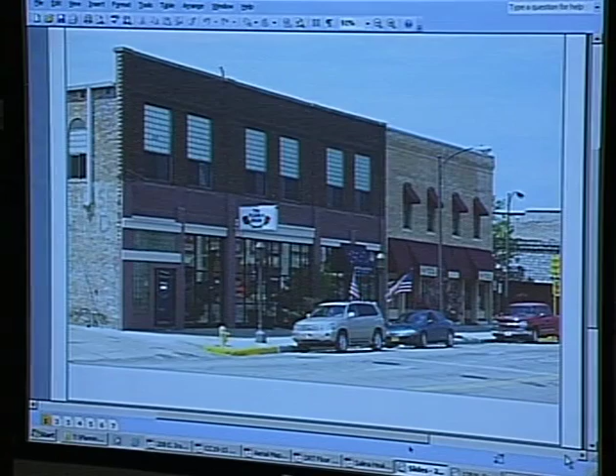The building at 208 has some history outlined here. It began in 1919 as an agricultural implement store, continued as a billiards parlor in the 1920s, then a hardware store again from 1923 to 1939 and continuing to 1946. It also was the location for a Pittsburgh Plate Glass business starting in 1946, and later the Salina Glass Company, which you may remember. Then on March 7, 1981, there was a fire that damaged some of the upstairs of the building, and it was used primarily as a warehouse after that.

The building has 75 feet of frontage, and the front facade is distinguished by its big spandrel beams. The design has a wainscot of painted material, with stucco detailing above the storefront openings, in locations that originally had an overhead door. There was some stucco covering on the pilasters that divide the building up. The eastern 50 feet is for the Flower Nook, and there is a lease space on the other 25 feet, which has generally been a beauty shop.

This just gives you another view. It shows that it's mostly glass.

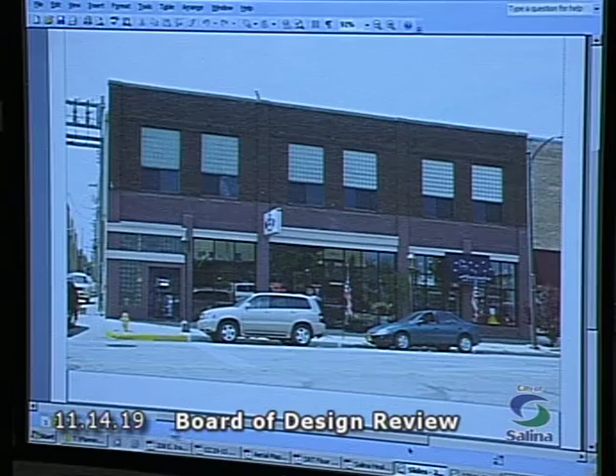The projecting Flower Nook sign was installed in 1998, and the applicant is proposing to augment the existing sign by putting a decorative surface sign on the stucco transom area above the storefront and on the storefront pier. This shows both the before and after, where the new artwork would be over the upper transom area, basically on the second story, measuring 9 feet in one dimension and 6 feet tall in the other. That would be a vinyl product, heat applied to the masonry, giving it a very durable and vibrant colored surface.

The proposed sign would appear to be proportional to the building and should not dominate its appearance. It would add an attractive element to the storefront, which currently has only one small projecting sign, and the colors and materials used would be compatible with the adjacent materials.

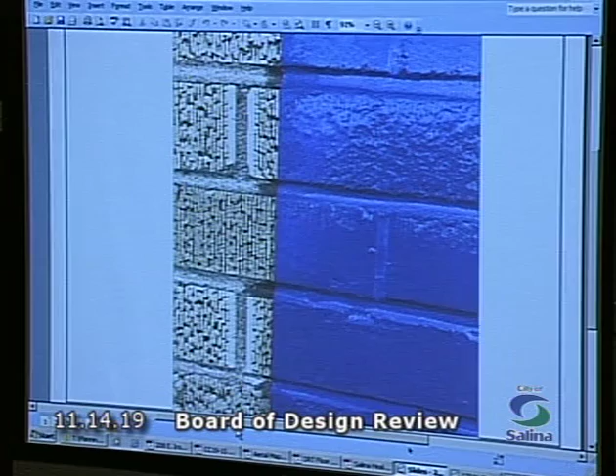If we could go one more, Dustin, on this. This shows an example of the product on a sign on East Iron Avenue, a larger sign, and this is the bonding product here. It's a vinyl product that's heat applied to a clean brick or masonry surface, and it adheres very well. The product is warranted to be color fast and weather resistant, certainly as much as a painted sign would be.

The sign could be considered a mural. Our sign code defines a sign broadly as any illustration painted on a building used to announce or direct attention to services offered inside. In this case, it identifies products inside the building and augments the existing sign, which requires submission of a sign permit application and your review. We have an arts and entertainment ordinance in progress with downtown constituents, and the definition of a mural may become more fine-tuned. At this point, this is similar to the Welcome to Salina sign put up in 2017 by Leadership Salina, which also required both a sign permit and board review, so we're consistent in that respect.

As far as suggested findings today, we believe the proposed sign will be coordinated with the overall facade composition. It will emphasize structural elements and will not cover or obscure architectural features. We believe the colors and materials shown are compatible with the building, and the use of symbol and logo signs is encouraged downtown.

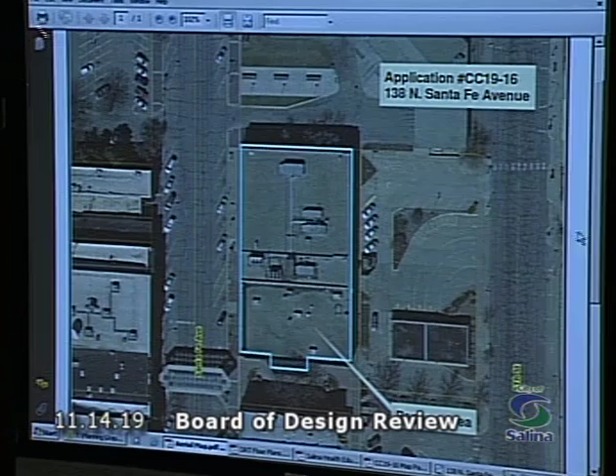The city records go back into the 1950s and 60s when these buildings were originally built as banks. This shows the overall perimeter of the building. The top portion of the building has been rehabbed for the KU School of Medicine, and what they are looking to do is develop the south 74 feet for the nursing unit of the building.

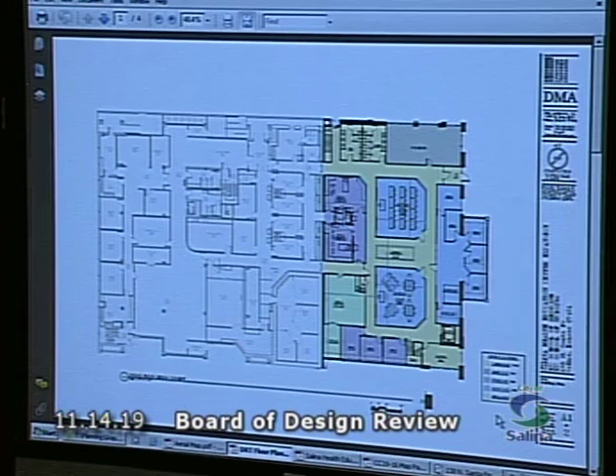The colored portion shows the proposed floor plan where these areas that currently have alcoves would be built out and developed into storefronts, both here and in this location. This protrusion that is currently glassed would become offices in that location, and the rest are supporting structures. But the idea is to integrate the building together because both those units are very compatible.

To do that, they're going to replace a portion of the south 74 feet facade, and this shows the existing structure. The north building is different in that it has some different divisions and building bays, a curvilinear storefront cornice, as well as these prominent pilasters and a recessed storefront. That was looked at in 2017 and approved by this board.

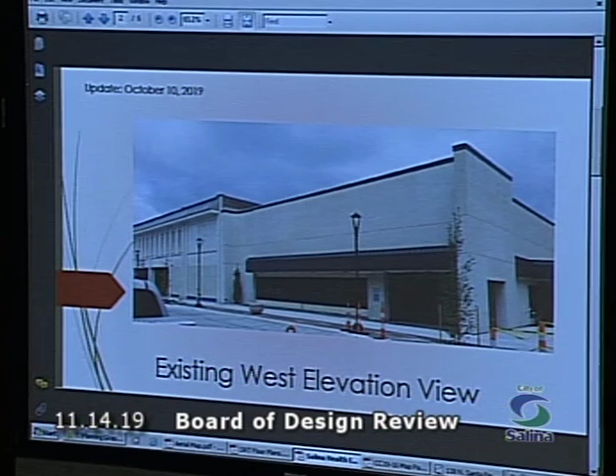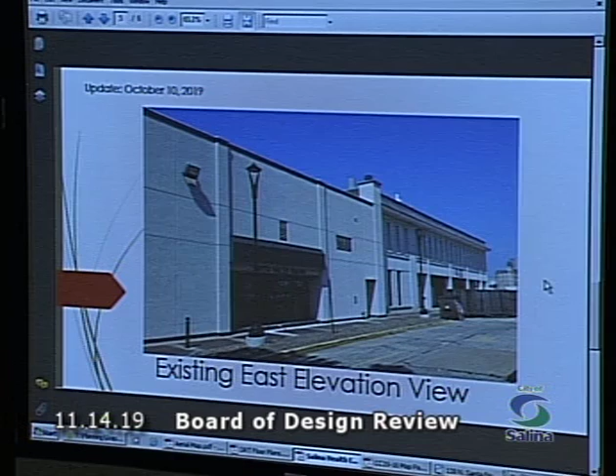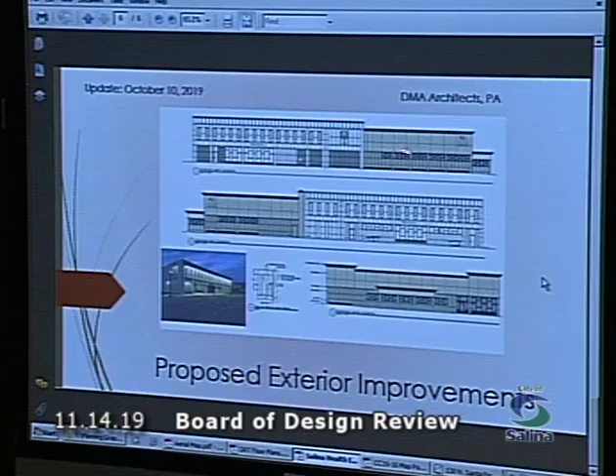What is being proposed at this point is shown in the next slide, where the south building shows that the bottom 8 feet of the facade will be removed and replaced with a stone veneer finish similar to the building at the north, where it has divisions starting at approximately 8 feet. This is a stone material that's different from the stucco cover.

They would retain the paneled stucco covering on the upper part of the building, but would replace that with the stone panels and raise the windows up further into the facade so that it matches that 8-foot height, mainly for privacy on the inside. That same treatment would be on the other sides as well, on the south.

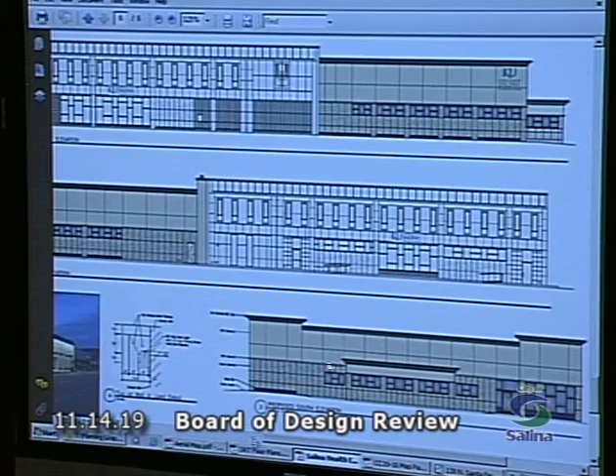This shows the south building and the east of the building here. Basically, this takes away two of the alcoves but develops an entrance on the very south of the building where there will be a new storefront.

So what you're looking at is just a variation in the materials on the outside of the structure. They would be approximately the same tone and servicing, but the stone veneer would act as an accent, as well as having windows that are both functional and compatible with the spacing and the rest of the building.

We believe the proposed new wall signage will replicate the existing signage on the north building. These would be duplicates of what's existing now on the north building, and that will be placed on both the east and west sides of that south 74 feet.

The new windows would appear to be proportional to the structure, and the facade of both buildings are contemporary in nature. The proposed exterior renovation, because of that, should not negatively affect the building's overall character.

Under findings, we believe the proposed changes will not remove or damage any significant character-defining features. The building reflects its origins and renovations from the 1960s, so intact architectural features will be preserved wherever possible. Construction methods will be used to protect historic and original materials, and the proposed wall signage will match the existing signage and be proportional to the building.

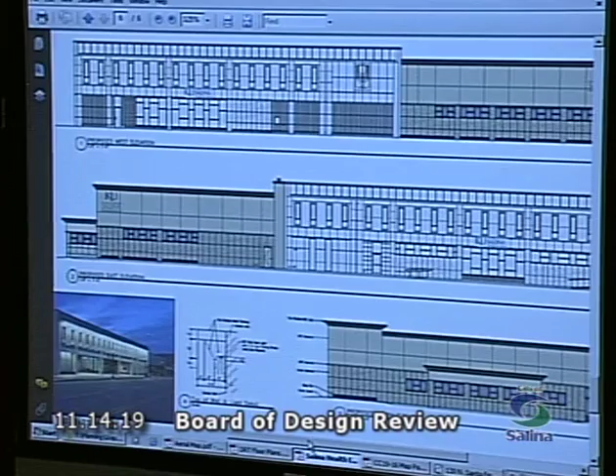Staff would recommend option number 2 — that if there are any significant changes, these would be presented to the Development Services staff to determine whether additional review is required. This is also held in abeyance for 14 days for public protest or appeal. At this point, staff would welcome any questions.

We do have the project architect here today who could answer the finer portions of what the surface materials and the final colors would be.

Okay, thank you, John. Does anybody have any questions of staff? None? No. Okay.

The applicant is present and would like to speak.

My name is Don Mars with DMA Architects. John, I think, has done a very good job explaining what we're talking about doing.

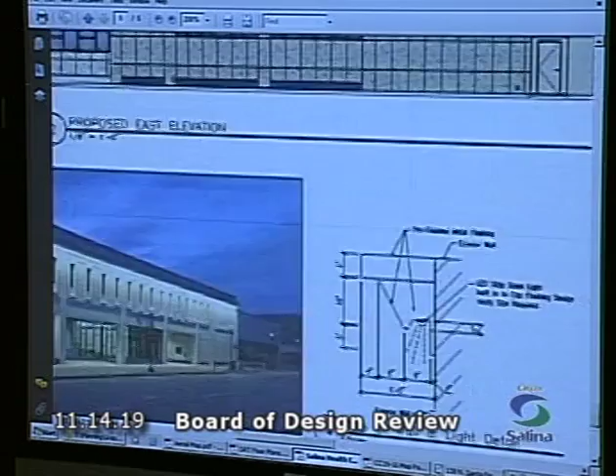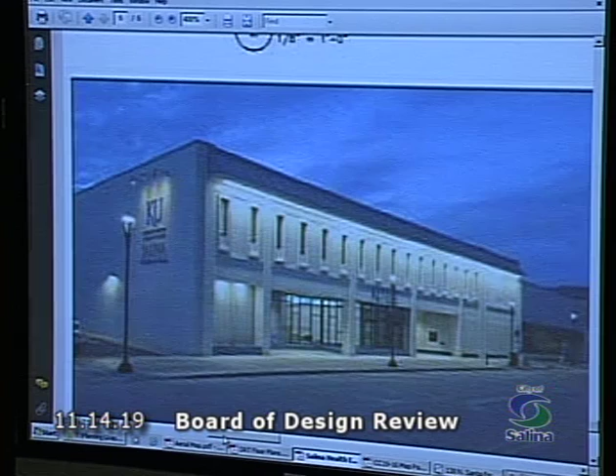One of the things the picture down here shows, and I use this picture as an image to show the foundation board as well, is that we lit this cornice up very well on the front here. We're planning on putting a cornice on top of the south building that we can add light under, so that we light it in the same manner as the north building, carrying on that nighttime lighted character of the building into what we're doing.

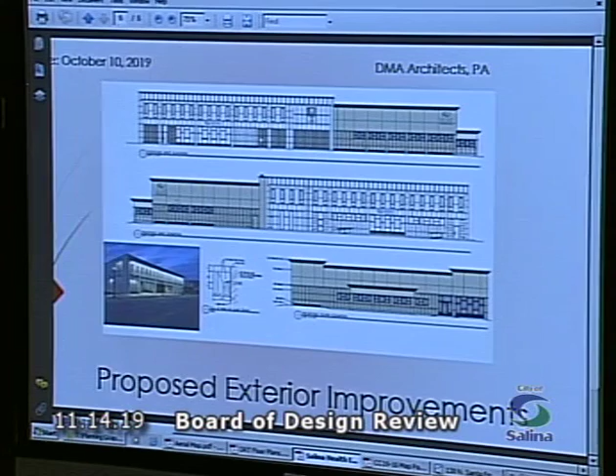The other thing I would add — the plaza on the south side of this building has been completed, and the city's shared with us the design and layouts, with a few modifications to be made. We'll be taking the landscaping material out during construction, because we've got to get access to the exterior of the building, and then putting it back. We have an agreement worked out with the city to do that.

So those are the issues. When we're done, this dark metal facade obviously is going to be gone. The plaster materials John was talking about — we'll retain them above basically this horizontal line that matches up with the line on the other building.

We replaced the stone on the east side of the other building when we did the initial renovation in 2017, and we're using the same material and the same kind of patterns to carry it around to the front. We also used some blue tile on the bottom of the facades on the front in a couple places.

In our design drawings, if you could go back to them, I'll point that out — this band across the bottom is the blue tile we're talking about, and there's the entrance. You'll see it in a number of specifically chosen locations around the exterior, coinciding with what we did on the other building to draw the two together.

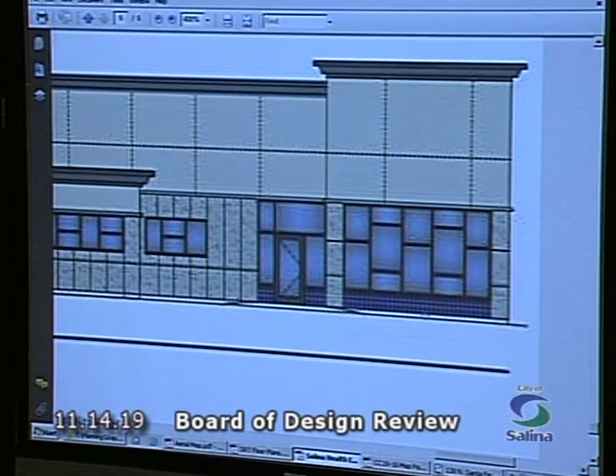When this building is done, the use of it will be simultaneous with both the medical school and the School of Nursing. The classrooms on this end are all based on their curriculum and schedules as far as how things get scheduled out. The design and layout of what we've done here will really enhance what they're able to do to deliver services for education and training of the nursing students and doctors. So, questions, I'd be happy to answer them.

Okay, thank you. Does anybody have any questions for Don? I guess the one question I would have, Don, is about the signage.

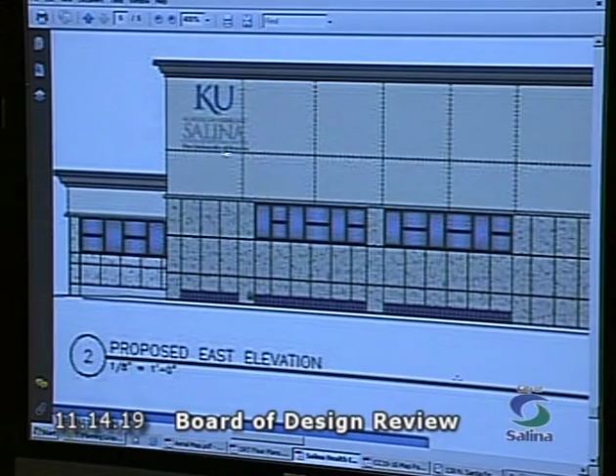The signage on the east side, is that going to be similar to or the same as the one on the north right now? Yeah, this was the proposed location we had for the sign. There's discussion about whether or not we will put that sign up, because on the east side—if you zoom out, Dustin, and go to the existing building, slide it down a little further this way. I want the back side, the east side elevation.

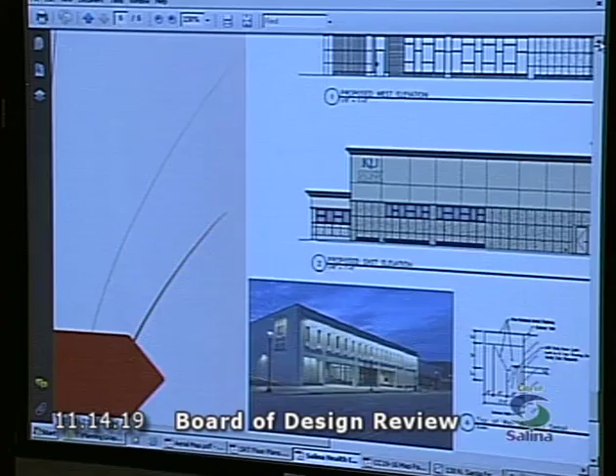The east side of this building has its entrance—the main entrance for the school is down here, and the main sign is on this side. There's a sign similar to this on the other side, and then the sign that's up on the gable. That gable sign will probably be on the south end of this building, on the Santa Fe side, and not on the east side.

Okay. And that'll be the same sign, and it'll be lit the same as the one on the north? Yes. Okay.

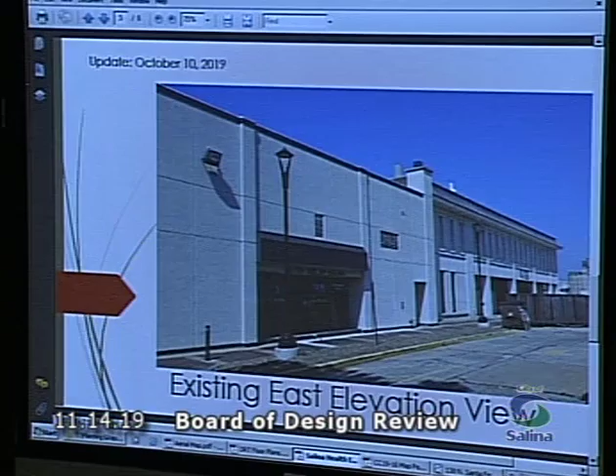The University of Kansas's sign czar, as we call it, has dictated what the signs will be and how they're done and dealt with. I think they've done a very good job with what they've done, and it displays quite well.

What's interesting too is over just the short 2 to 3 years we've dealt with this, the opportunities for outside LED lighting have changed significantly compared to before. So it'll be lit, but probably with LED instead of with two individual floodlights. Okay.

What was my other question? No questions? Nobody has any questions? Okay. Thank you, Don.

Well, we'll bring it back to the board for discussion. Is there any discussion? None whatsoever. Okay, well, seeing as no one has any discussion, I guess I would open it up to a motion.